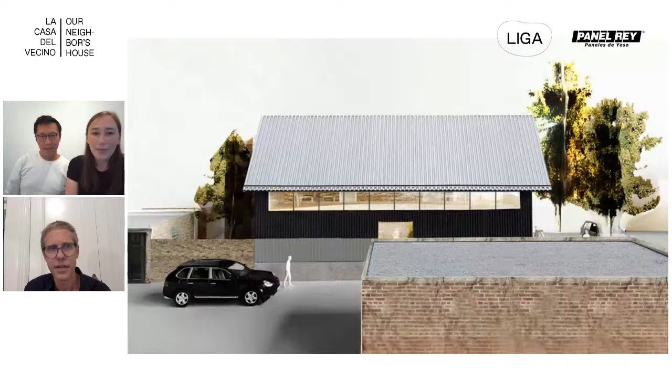Maybe I could show the first slide. You'll see this home—maybe from this image you can't quite tell, but it's on an alleyway. That's where the car is driving.

If we go to the next slide, we can see the site condition. It's a really traditional urban site in Chicago, with these 25-foot by 125-foot lots. When we were looking for land with our real estate agent, as a developer, we had a very tight budget, so the properties we were seeing always had something wrong with them—undesirable in one way or another. This one in particular, our agent suggested we not buy, because it's noisy along the alleyway, there's no privacy, he said you're just going to see garbage trucks all day long, and no one will ever want to buy a new home here.

We understood those concepts and thought maybe we could try to design around them in an interesting way. The next slide shows that condition a bit more—you can see this is on the alleyway. So we wanted to take the standard lot and transform it.

Often when we talk about the American house or residential project in America, one thinks about the generic suburban residential plot, where conditions are quite banal or not relevant for design development. In your case, that's different—the site became a crucial motor to develop your project.

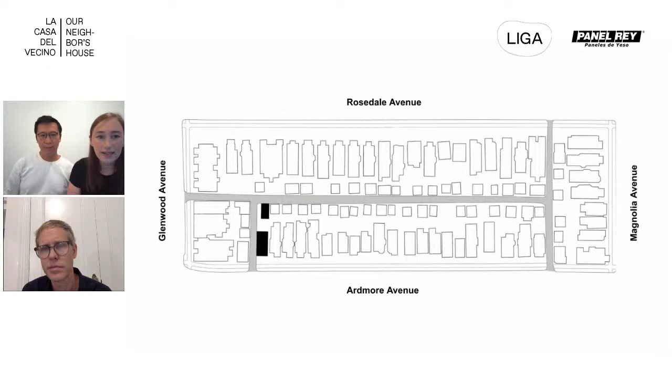Maybe we could go back to the slides. Our approach to this site had to address the privacy and noise issues. When we think about the traditional section, in a single family home you sleep on the second floor and have all your living program—kitchen, dining, family room—on the first floor, then store everything in the basement. We wanted to flip that traditional section so the spaces where you spend the most time would be above the alleyway, where a lot of light could come in, versus where you sleep, which could have less light.

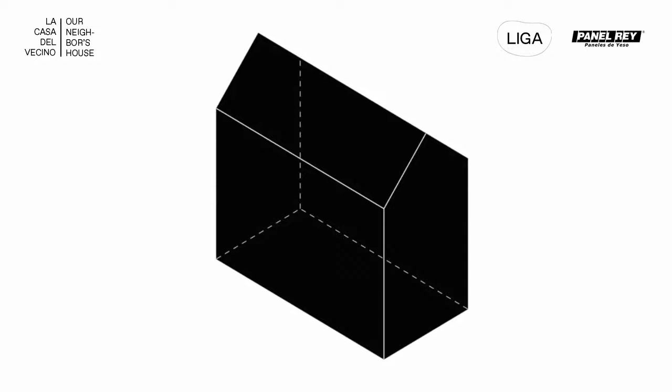And if we pushed all the bedrooms against the neighboring lot, we'd have more privacy. The next diagram shows that—we created a more solid middle section for the bedrooms, pushed further against the neighboring apartment for more privacy from the alleyway. The second level is then structured as totally open, supported by four trusses.

Making the shifts you proposed is a tricky balancing act between the conventional and the innovative. When you do this shift, you also live underneath these roof trusses, which play an important role in how you live in the house. Is it structurally as well a balancing act between the traditional and a more daring proposal? Can you explain?

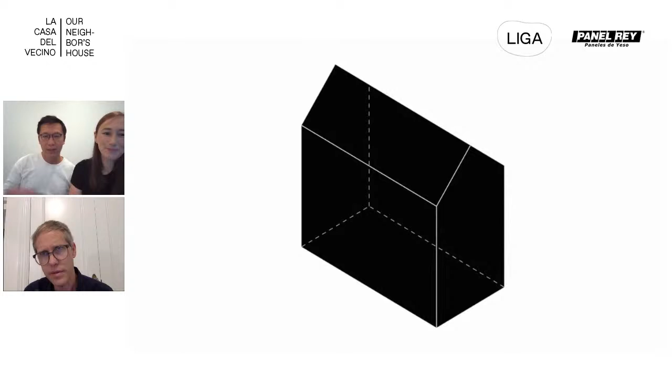Yes. Can we show the slide, please? Next. So here we show that the conventional structure - we don't see the structure at this moment, but we see the space beyond it.

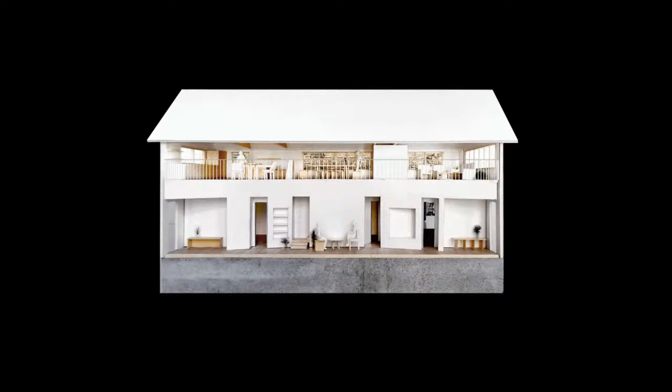On level 1 it's more solid, which relates to what Alison mentioned about the living space. On the upper floor is the living room, which is very open. You can see the truss spanning across the house, showing the openness we described.

And the way we see the courtyard here shows how open the space is, and the bedroom is pushed toward the neighbor side. Next, please.

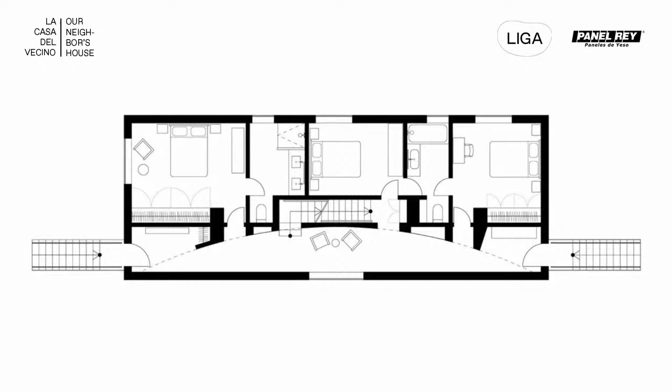And here is what Wonne was talking about, the conventional method. One thing is about the facade on the west side that is two-story high. When we came back from Switzerland to work and opened our office, we wanted to find something very conventional - what Wonne was talking about is the Chicago style.

Can you tell us where you were working in Switzerland? We were working for Herzog and de Meuron Architects, and this is about wanting to find a conventional technique in Chicago that is easy to build for the builder, while also being grounded in the Chicago context.

On the left side of the wall, the west wall, is a double-high wall. We use the Chicago balloon frame, a 2-by stud grounded from level 1 to level 2, that holds up the four trusses on the right side.

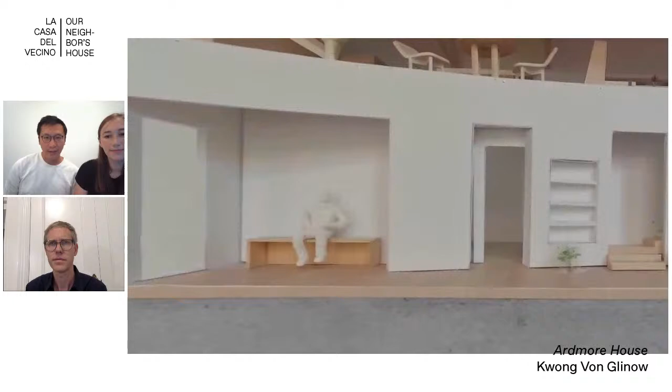Once the 2-by truss holds up the entire roof, on level 1 the courtyard becomes very open, and we don't want to call this space a hallway, but rather an interior courtyard space. In this interior courtyard space, we think the best way to let the potential owner use it is to create program within this courtyard.

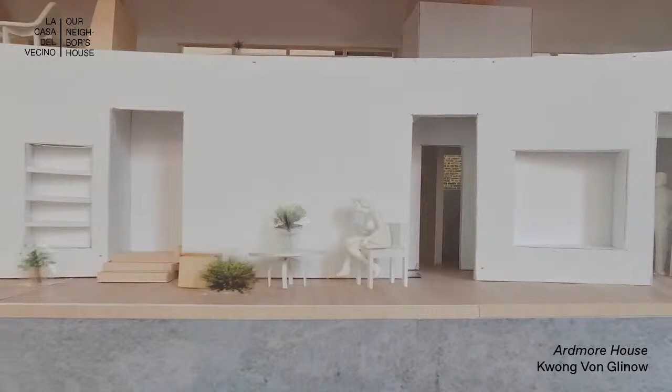From the three doors you can see, they lead to individual bedrooms, but the first space we see is the mudroom on your left side. And so I can replay it again.

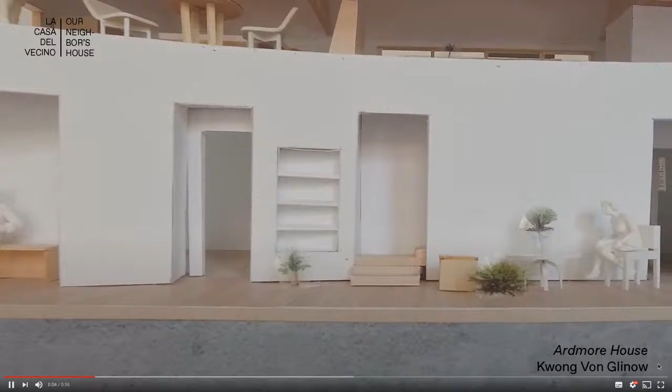The bookshelves allow people to put a book on the shelf and then read in the middle of the space, where the lady is sitting on the chair. The square nook is for people to sit and enjoy the space. And the last is the entrance space.

Can we go back one slide? Next, please. Once you are in the interior courtyard, you see the four trusses held up by the Chicago balloon frame on the left side.

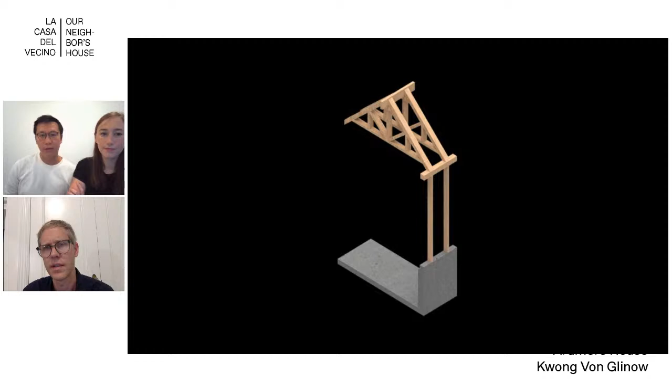This is the diagram showing the truss is extremely conventional, spanning across the entire width of the lot, 22 feet. On the right side is the two 2x6s, a very conventional way to build in Chicago.

When the rough framer finished framing the house, he was very hesitant to take out the diagonal bracing holding up the house, because he couldn't believe it was only supported by 4 trusses. We worked with a very good engineer, Bob Magruder, to use only 4 trusses, while still using a very conventional method, the Chicago balloon frame, to hold up the entire house.

We've talked about many things now, the program and the structure, and there's of course a very strong formal gesture in many of your projects that gives it, in this case the house, a strong identity.

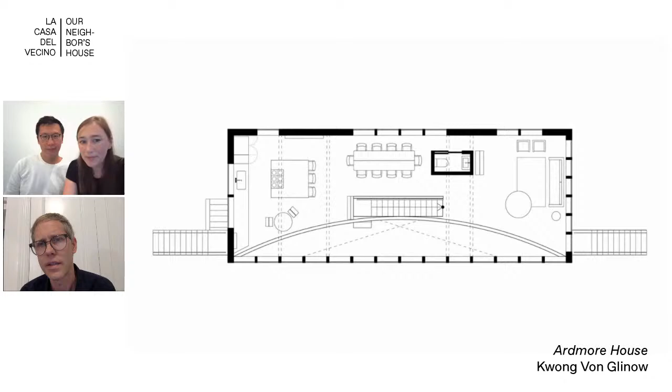With the 4 triangular trusses, we tried to create 5 distinct spaces upstairs. This room here is the living room. Underneath the 2 trusses that receive natural light from the skylight is the powder room. Then this is the dining room, then here is the kitchen island, also underneath 2 skylights between the trusses above, and then finally the kitchen area.

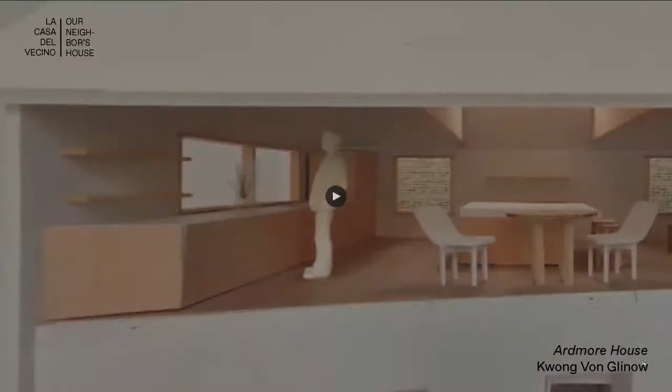So then this is looking down through the 4 trusses.

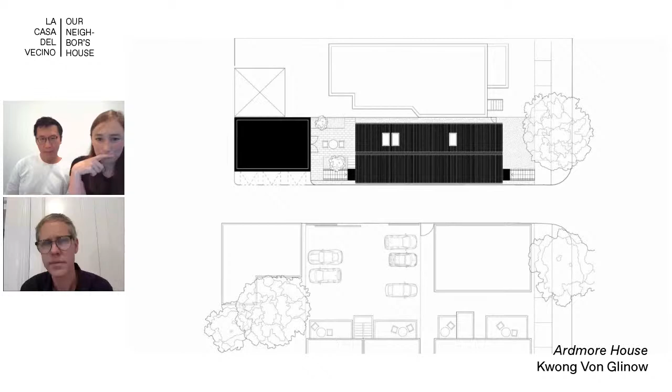Going back to this idea of the site condition, what you're looking at in the site plan is the back of the apartment buildings across the way that also have all of these balconies coming off of them. This interior railing also becomes like an interior balcony facing these exterior balconies, so there becomes this interior-exterior urban relationship across the alleyway that's pretty interesting to experience.

As you move along the alleyway, when you're looking towards the front of the home, it's a much more lush, traditionally beautiful greenery with these 100-year-old trees. You really feel like you're kind of up in the trees at the front of the home.

It also has a very Japanese vibe to me, like it reminds me of a lot of contemporary Japanese architects, not only in its materiality, but also in these houses where different sectional strategies are applied to create an intersection of smaller spaces, making the house generous and three-dimensional. I think that's what happens with a lot of housing projects, that the only place where the house is really three-dimensional is the moment of intersection of the staircase. And I think here that is something completely different.

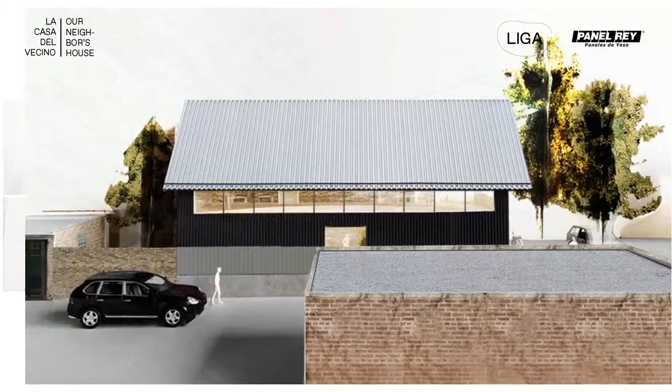We tested out some rendering and collage to show how we could use bi-color to break up the scale of the house. We got so excited that we sent it to our brother, an image of the rendering and an image of the Range Rover. Then he kind of joked and sent back another image to us.

It was the Rothko painting, literally black on top and gray on the bottom. He jokingly said, do not tell anyone about the Range Rover—let's just tell everyone it's inspired by the Rothko painting. The interesting part is that as architects, we got inspiration from the Range Rover, but at the same time my brother, who is an engineer, was talking about a Rothko painting.

It's interesting because that picture window, with the front door, makes the house seem like it doesn't have a direction. It seems to have as much emphasis on its side facade as on its front facade. And I think that's really beautiful in its development.

And of course, I didn't—the reason why I wanted to talk to you is not only because I like the Ardmore House. I'm also interested in your full body of work. I think projects don't stand by themselves—there's always a creator or team of creators behind this. I really wonder how this project, because this is, if I understand well, your first built project.

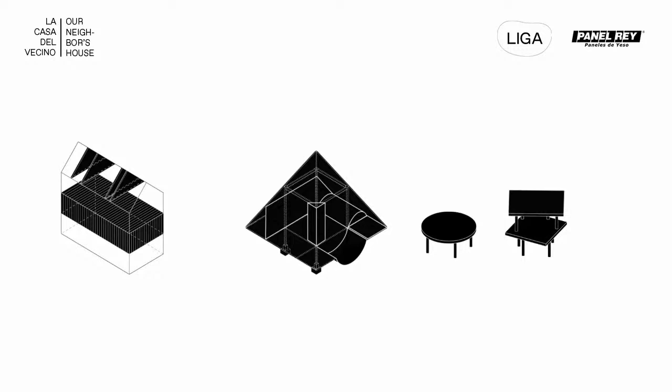Yeah, definitely. I think for this project, it goes back to trying to make the project relatable and understandable. That's how we try to approach a lot of the work in our office. If you go to the next slide, we have a diagram showing how we try to communicate simple, obvious forms and their usefulness or potential to be used as architecture. For Ardmore House, our goal was to really communicate this flipping section that the facade tries to communicate. Maybe there's also something about the two-tone facade that communicates something's reversed on the inside.

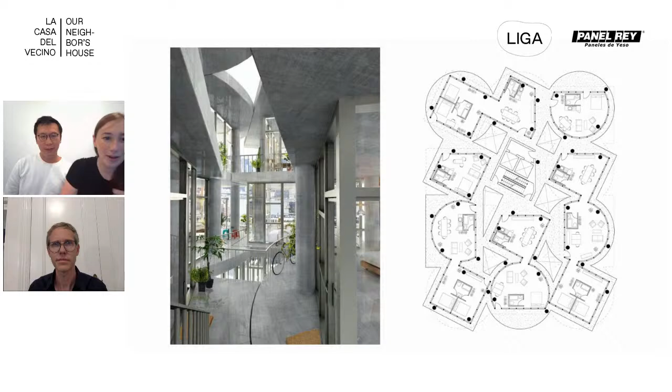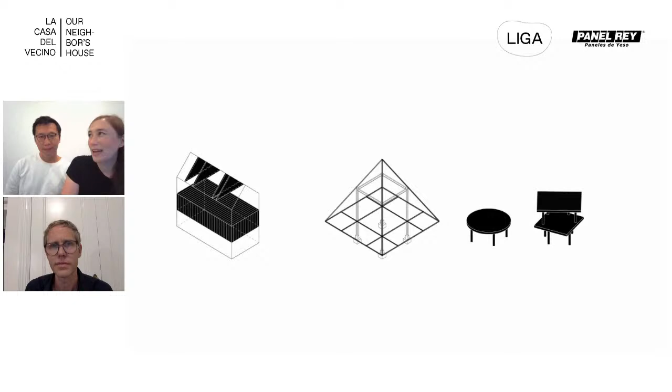We also have a Riverwalk project along the Chicago River that we'll be building next summer. That project is a big pyramid canopy with different playful items underneath it, communicating a symbol of a space to come and enjoy and try out something new in. And our tabletop apartments, the last project in this diagram, is really simply the form of what a table is like, stacked on top of each other to create apartment buildings.

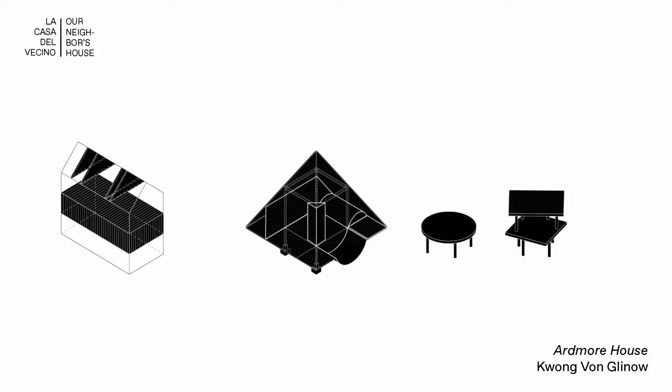The idea with a lot of these forms is a phrase we use a lot: borrowing the familiar, as a way to take something many people know and recreate it, repurpose it, or re-imagine it, so it's still recognizable but has a different use, a different experience, a different atmosphere. There's still a connection, so it's not this totally foreign, unknown, alien object you're going into—there's some familiarity already. So there's something relatable and easy to understand.

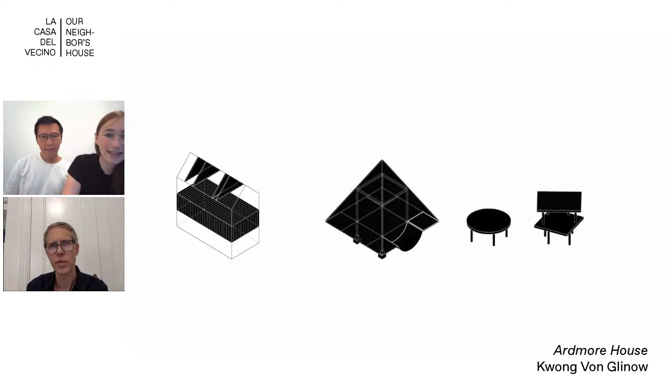With the tabletop apartments, that would be almost like the simplicity of a structure of floor slabs and columns, you know, exactly that kind of table structure.

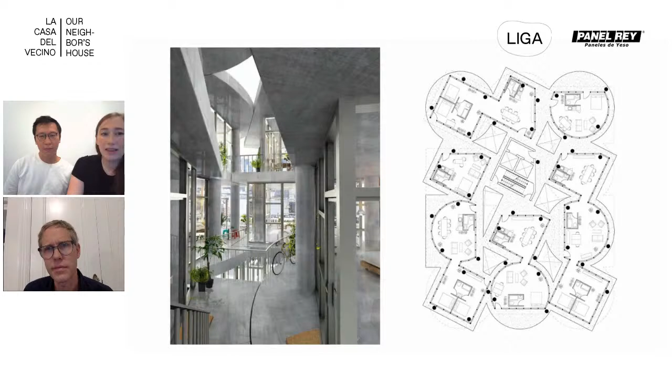And then we have one more slide. This is maybe a more in-depth example that I think is interesting—one of the first projects we worked on as an office together. What was important here was thinking about new housing typologies and how we could rethink living very densely. When we study a lot of housing plans, we often see a double-loaded corridor with simple housing units on either side, and this was a space we really wanted to never have to put into a project of ours. So in all our housing projects, we tried to erase the corridor. This is one example that we also brought into Ardmore by creating the curved interior courtyard. So even though it's a totally different scale, we've tried to bring concepts across projects.

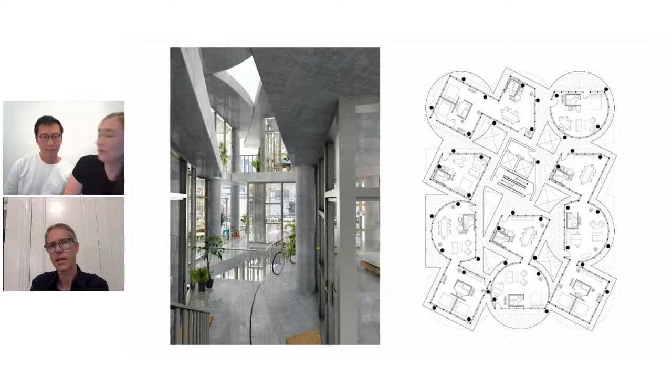Yeah, I can really see how there's a sort of formal excuse that throws things off and allows you to rethink and create new typologies. Because in the end, you're not interested in creating that formal exception—that's just a starting point, an excuse—but to really create these different housing solutions and typologies, like you did at Ardmore House. I find it absolutely fascinating.